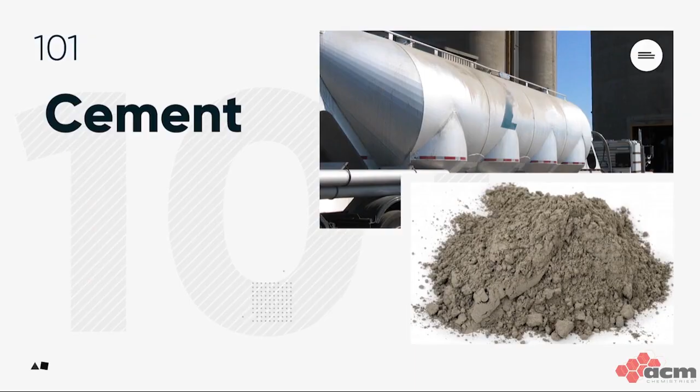Today we're going to talk about a raw material that is often confused with concrete. It's a common mistake to talk about a cement truck or a cement sidewalk when what we really mean is a concrete truck or a concrete sidewalk. Cement is actually an ingredient in concrete.

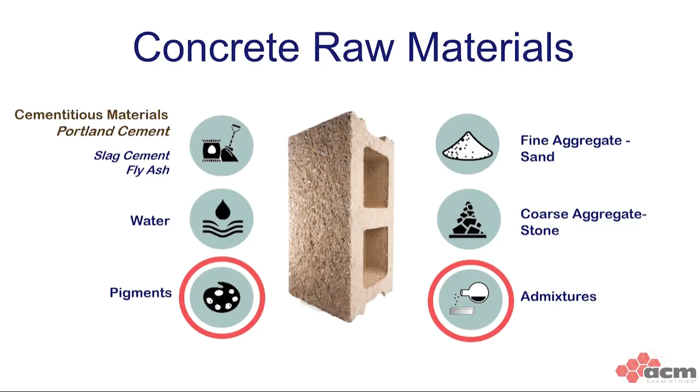At its simplest, concrete is made out of cement, water, and aggregates, or sand and stone. Concrete can also contain other things like additional cementitious materials, pigments, and admixtures. But today we're going to focus on the cement. So what is cement, and why is it so important?

Well, cement is a fine powder that when we mix it with water, it reacts chemically and hardens, forming cement paste, or the glue that holds the aggregates together, forming the concrete. And it's important because it affects a lot of the properties of what we make. First and foremost, it has a major impact on the strength and durability of the concrete we make. Proper strength and long-term performance is important to all of the products.

Second, the color of the cement has an impact on the final color of our architectural concrete, such as pavers, water-repellent block, and segmental retaining wall units. This is especially important for lighter colored products. And the lighter the color of the cement, the sharper and brighter will be the final color of our pavers and block.

Finally, cement has a major impact on the final cost of our products. Cement is the most expensive ingredient in our mix, so if we use just enough cement to get the properties we need but no more, we'll make the most cost-effective products possible.

Now, we said that cement affects the strength, and yep, if you use more cement, you get more strength. So for some products that need to be stronger, like pavers, compared to others like concrete block, we'll need to use more cement.

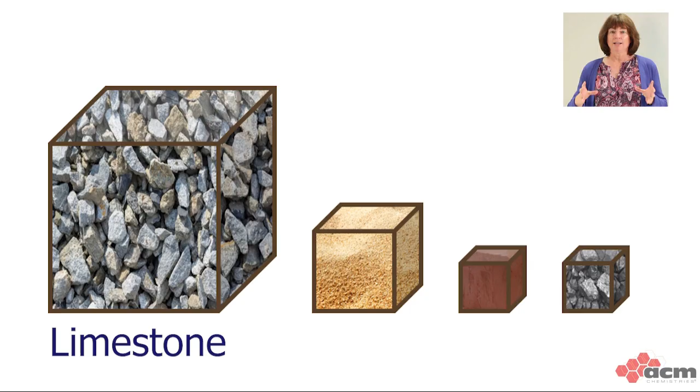So what is cement made out of? Cement is a manufactured material made from a combination of limestone, silica sand, clay, and iron. And how is cement manufactured? Cement plants are built on quarries where the various rocks are mined.

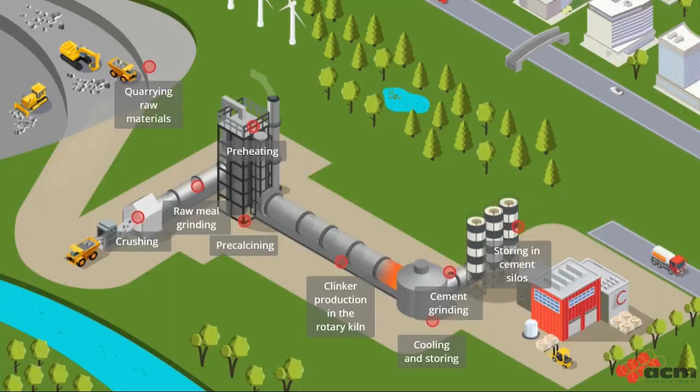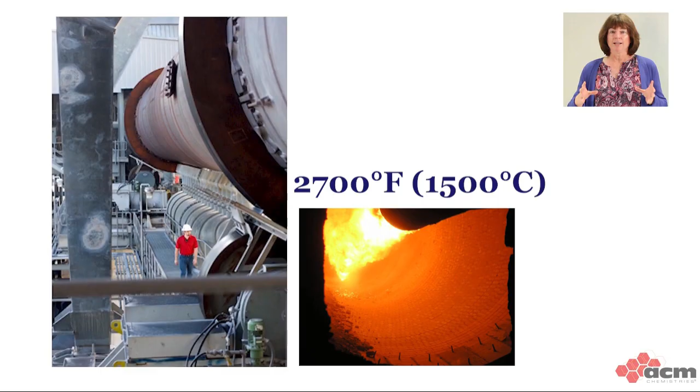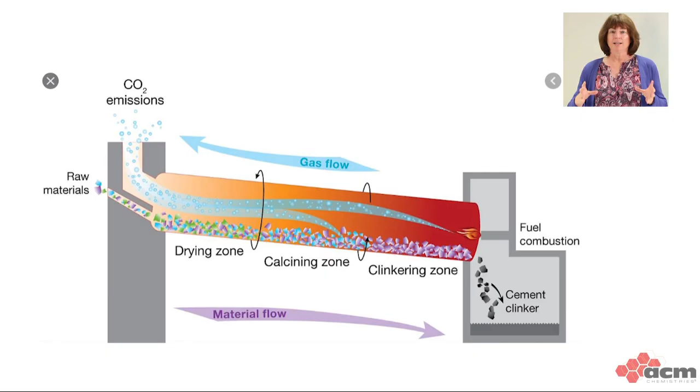The different types of rocks are mixed together in precise proportions and crushed, and then fed into a very long rotary kiln under tremendously high heat of around 2700 degrees Fahrenheit. The high temperature causes the rocks to decompose, with carbon dioxide being released from the limestone and water being released from the clay. The remaining materials chemically combine to form a new material called clinker.

This is a dark-colored marble-sized material. The clinker is mixed with gypsum and then ground up to a fine powder that we call cement, which is basically dehydrated rock powder.

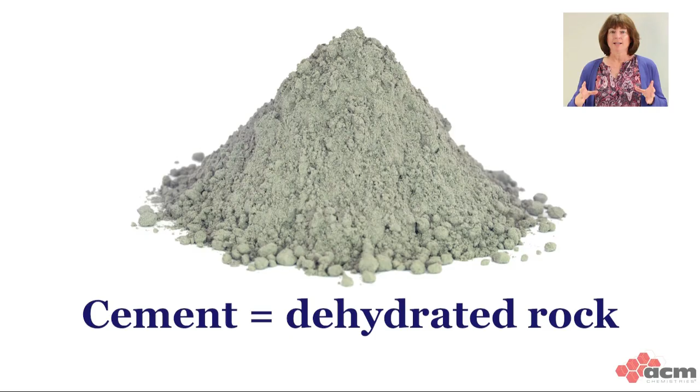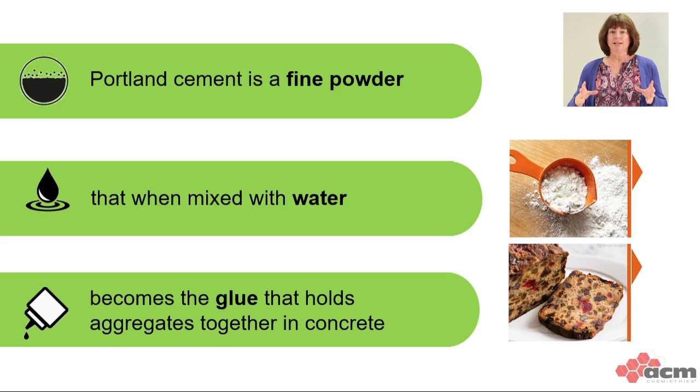Different kinds of cement. We talked about cement and water paste being the glue that holds the concrete together, just like flour and water being the glue that holds baked goods together. Besides the amount of flour that Dean uses, he can also use different kinds of flour, bread, cake, gluten-free, to make different kinds of baked goods.

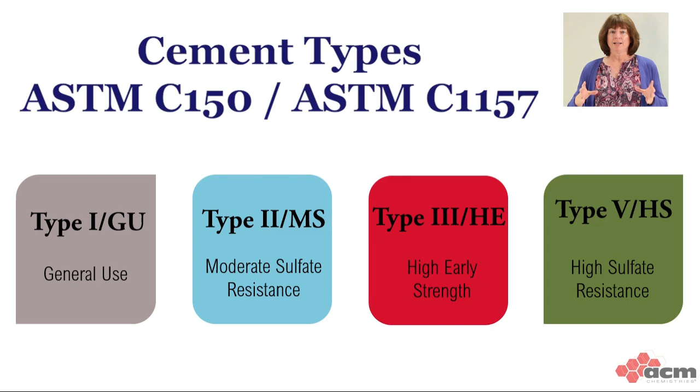Cement is similar. There are basically 4 main types of cement with many different additional classifications depending on how the cement is made or how it performs. To make it even more confusing, there are also different ways to describe them. So all in all, there are more than 20 different classifications of cement.

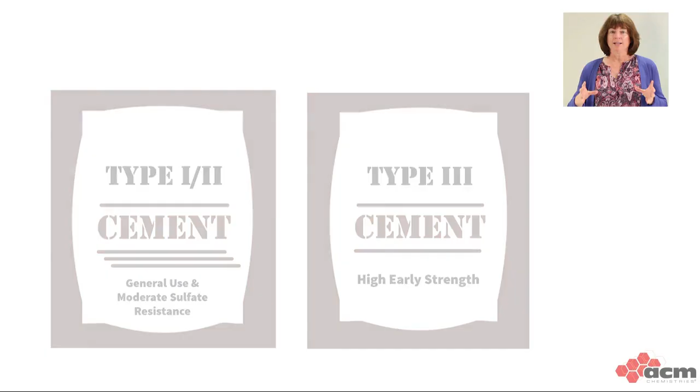Sure. To simplify things, there are 2 main kinds of cement that most producers use. The first is type 1-2 or general use cement, and the second is type 3 or high early cement that gains strength faster in the first day or 2 compared to type 1. There's also one more type of cement that you may be familiar with, and that's white cement. This is a specialty cement used in architectural products, especially when you want to make bright, light colors.

This brings us to the word of the day, which is hydration. And as you guessed it, hydration has to do with water. Specifically, the chemical reaction that occurs between cement and water when they are mixed together. During the hydration process, the dehydrated cement reacts with the water and rehydrates, forming long needles. The needles from the different cement particles grow together and harden into a rock-like substance called cement paste that binds all the aggregate particles together to form concrete.

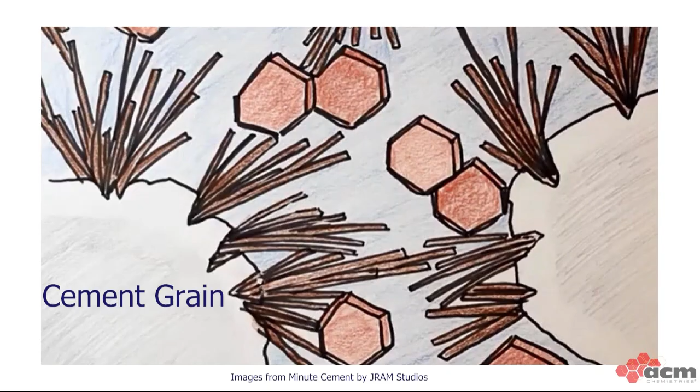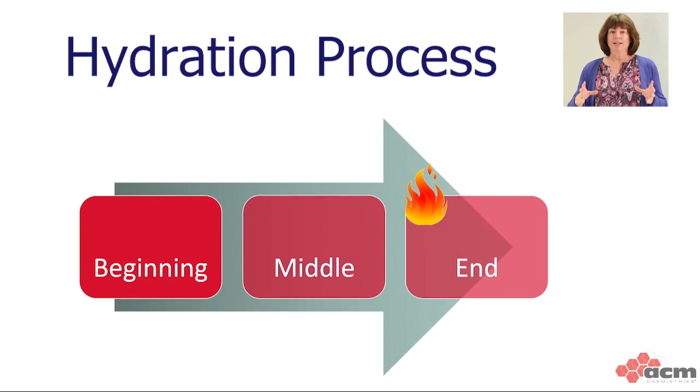Many factors impact the cement hydration reactions. It's important to understand that hydration is a process with different stages. It has a beginning, a middle, and an end. It's also exothermic, which means that it gives off heat as it reacts, and we can use the amount of heat generated to tell us where we are in the process. Also, the higher the heat generated at any given time, the faster the reactions and the faster the strength gain.

Let's look at a typical cement hydration curve at room temperature, and this is a representation of the cement hydration process. You'll notice that there is a heat spike in the first 15 minutes right after the concrete is mixed, followed by a dormancy period in stage 2. For those of you who have steam curing chambers or kilns, the dormancy period is why we don't turn on the heat as soon as the units go into the kiln. If we blast the units with too much heat too early, they will expand and crack because they do not have enough strength to hold together at this point.

After the dormancy period, the cement begins reacting again and heating up. This is stage 3, in which the concrete products rapidly gain strength and the cement sets or hardens into a solid piece, usually within 4 hours or so. After that, it enters stage 4 and continues to gain strength in the kiln. When the products are removed from the kiln, they continue to react and gain strength during stage 5.

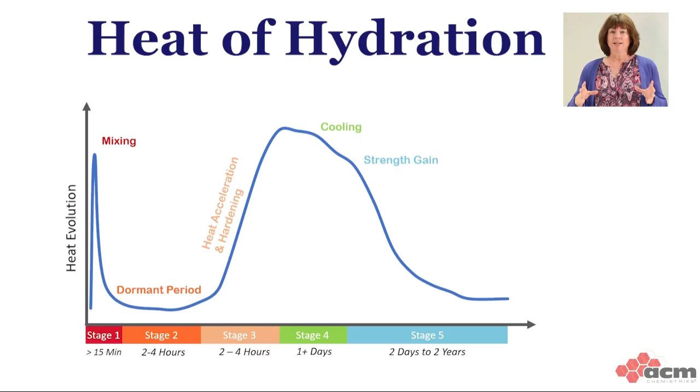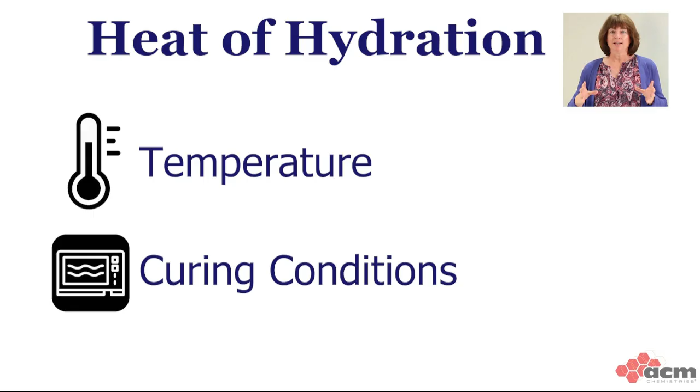While most concrete products achieve the vast majority of their strength in a few weeks to a month, it's important to understand that the cement hydration reaction keeps on going, even after several years, although the additional strength gain does slow down dramatically. It's also important to understand that cement reactions we just discussed are for concrete made at room temperature. Temperature and curing conditions have a dramatic effect on how fast the cement reactions go and how fast the concrete products gain strength.

At low temperatures, the reactions slow down significantly and practically stop when the temperature is below 40 or 50 degrees Fahrenheit. For more on this, let's listen to our local weatherman, Mr. Roger Raincloud.

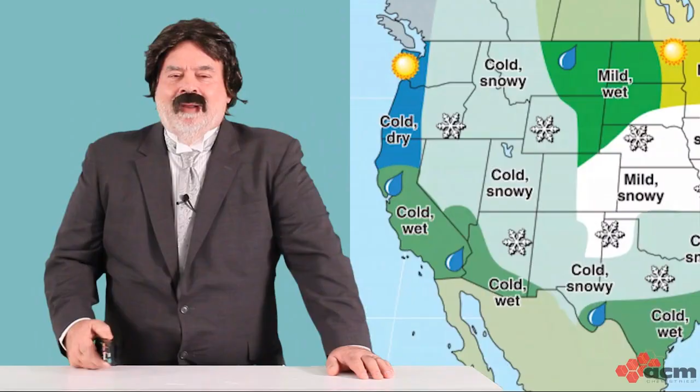So let's talk about the word of the day, and that word is hydration. We're going to talk about how I can forecast your concrete just like I can forecast the weather. So temperature matters a lot on how your concrete reacts, and it matters to old Uncle Roger here because it affects me in ways too. So let's talk about that a little bit.

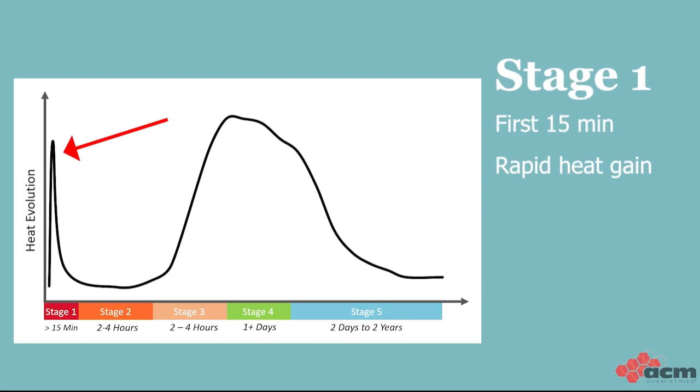If you look over here and you see the black line, that black line would be concrete that's curing at about 75-degree temperatures. The first spike happens right away in the first 15 minutes or so, and then it goes into a dormant stage for a couple hours, and that allows you to make it into something. And then you'll see it climbing a hill, and that's gaining more strength when it's in curing. And once it's out of curing, the strength gain starts to slow down just a little bit, but it'll continue for quite a while.

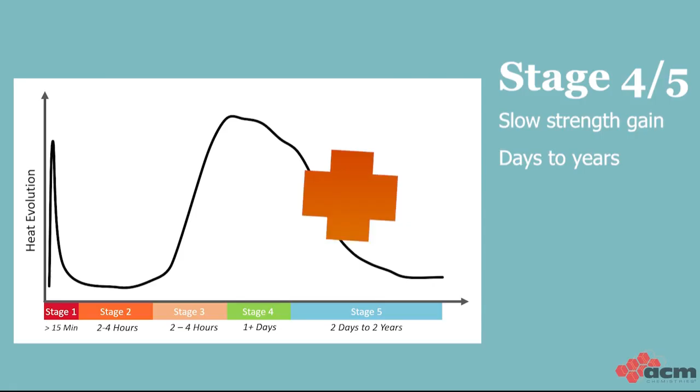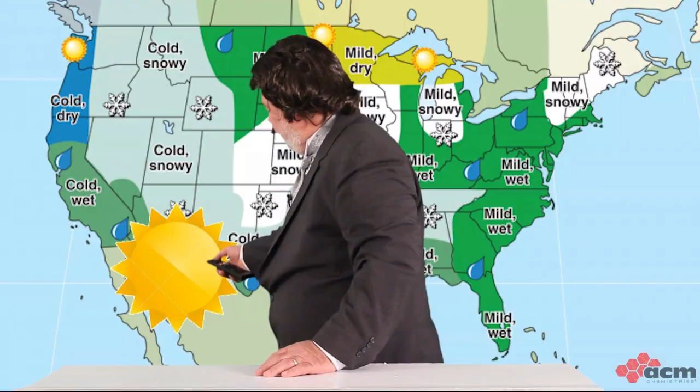Now, they gave Uncle Raj here a little clicker, so we're going to try this out. Damn clicker. So anyway, let's say that you live in the Southwest, say down here in Phoenix. There we go.

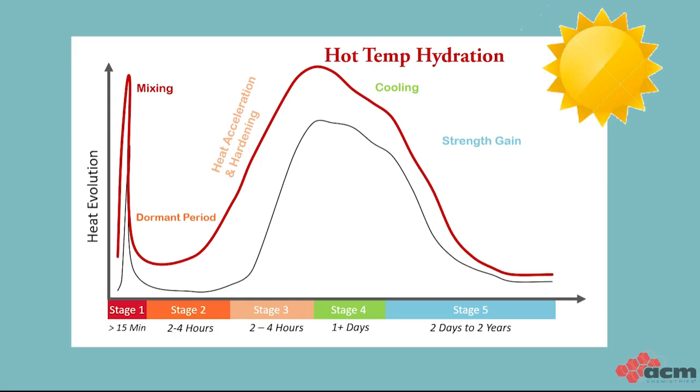So if you're living down there, I want you to compare that to the red line over here on the chart, and you're going to see that it gains a lot more strength earlier, and it's going to start gaining strength after the dormant period a lot faster. And that'll continue as long as that warmth is there. So the warmer the temperature, the quicker the strength gain.

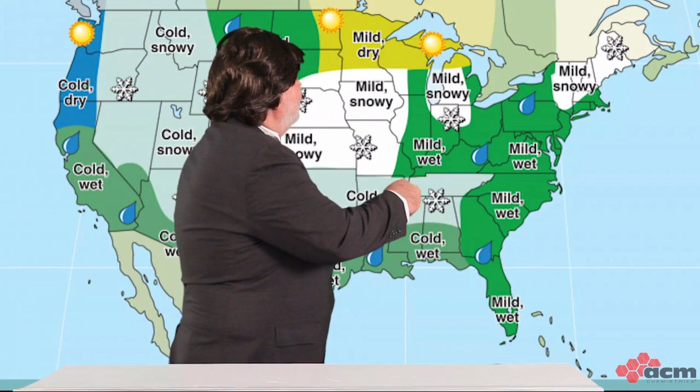Now let's just say that you live over here in the northeast part of North America, let's say in the GTA. That means the Greater Toronto Area for you non-Canadians. So if you're up there this time of year, it's pretty cold. So we're going to look at the blue line.

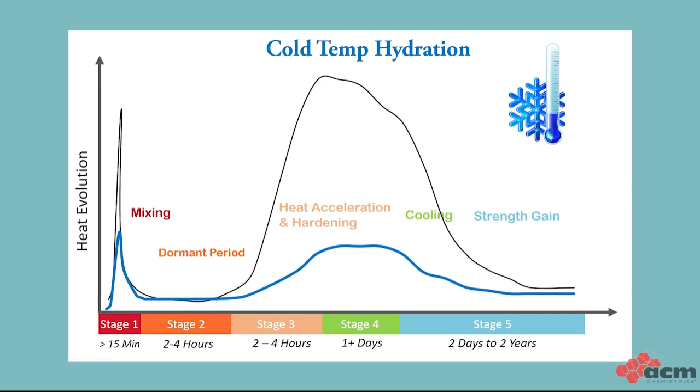Now the blue line would tell me that you don't have a lot of heat. It might be cold, might be just above freezing outside, and maybe your curing isn't really good, so it doesn't gain a lot of heat, and heat in concrete makes strength. So again, the warmer the temperature, the quicker the strength gain. The colder the temperature, the slower the strength gain.

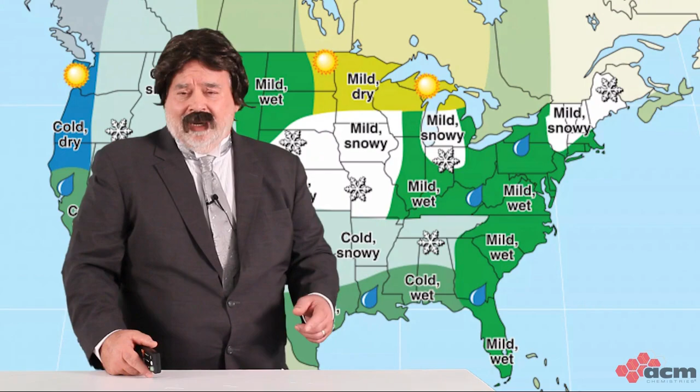So let's review what we've learned about cement. Cement is made by combining specific amounts of different rocks and heating them to a very high temperature in a kiln. During this process, water and carbon dioxide are driven off, and we form new compounds called clinker. When we grind this to a very fine powder, we get cement.

When we make concrete, we add water back into the cement and mix it with aggregates. This does two things. First, it makes the concrete workable and formable. And second, when the concrete products are put in the curing chamber, the cement and water react during the cement hydration process and stiffen and set, becoming solid again. This is the magic of cement.

It starts out as dehydrated rock, becomes formable when we add water, and then returns to rock during cement hydration. When combined with aggregates, this allows us to make the solid, durable products we sell today. Besides allowing us to make concrete, cement also has a major impact on the strength, durability, color, and cost of our products. And because it's expensive, we only use as much cement as necessary, but no more than we need. So that's the basics of cement.